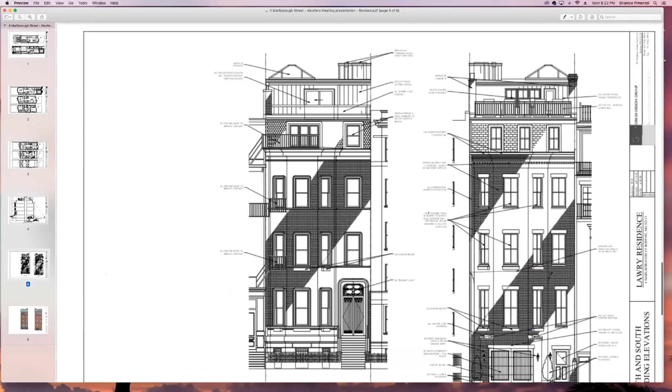Guy, if Shanice could just go to the top of the building view, I guess maybe slide 5. Sorry, Guy, I want to make sure - slide 5, what slide you would see it on, drawing A3. A3, do you know what number slide it is for the deck?

It should be the 3rd drawing. If you look at the 5th floor plan, the middle floor that says 5th floor, you'll see some details there.

On the right-hand side you'll see a deck, a roof deck, which is an existing deck up there. There's a dotted line that bisects that deck, which is the current location of the front wall of the penthouse. So we're pushing back the front wall by removing a section of the penthouse.

Towards the rear of the penthouse, you'll see another dashed line running through what looks to be a wet bar or kitchen area. There's about a 4-foot extension, maybe 3.5 feet, proposed to the rear part of the penthouse. So we're essentially shifting the penthouse towards the rear and reducing it in size. It's no higher than what's up there.

We are proposing an elevator shaft to extend above the roof. That's excluded from the building height by the zoning code, so it's not shown there, but there is a projection on the roof that doesn't require zoning relief. Obviously all of this, if approved at the ZBA, will still need to go through the rigorous Back Bay Architectural Commission application, discussions, presentations, and approvals. So this is just for the zoning violations.

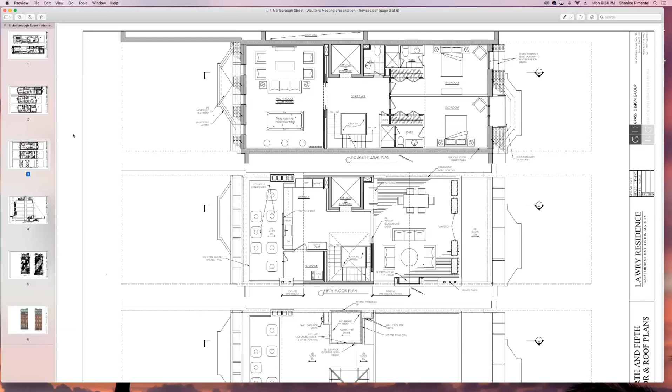The other issue is the rear yard setback. Did you want to show the elevation on the next slide? Yeah, sure, Shanice, if you can do that. There's a colored version of it—I don't know if you were able to get that in the presentation. Is it this one? Yeah, although the other one might give us a little more detail.

That is a prettier version for sure, but the other one might give us more detail with a guide dash line in there—you may want to describe that. Are we talking about the building section, drawing A4?

That's right, that's a good drawing to segue into the next part. It shows the location of the penthouse and the dashed lines of where the penthouse was and will be, and its visibility, which is an important consideration. But again, that's more of an architectural commission issue.

The other aspect is we'd like to square off the rear bay at the ground floor so we can introduce the garage door. And again, as Mike said, we're not extending the building closer to the rear property line except underground, and that underground portion is not subject to the rear yard setback—it's actually an exception, so you can build an underground encroachment into the rear yard up to about 5 feet above grade.

We're not going all the way to the rear property line, and we're not going above grade, so it won't be visible from the outside, but we are proposing to build underground towards the alley line.

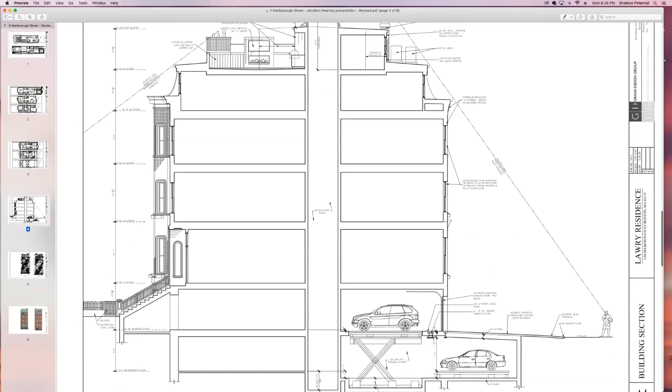But again, that's not subject to the zoning variance. The two parts at the rear are squaring off the angled bay, and we're also proposing to add two stories, extending that rear bay up two levels. Currently it ends at the 2nd floor, and we're proposing to extend it up to the 4th floor. Both squaring off the bay and adding the two levels are technical violations of the rear yard setback because about 1.5 feet of it is actually within the rear yard setback.

So the bay that's out there from the ground up to the 2nd floor is currently in violation of the rear yard setback. The building adjacent to us to the west goes all the way out to the alley line, so it's not uncommon to see an existing building in violation, but the addition of any space does need to conform to the zoning code.

So those are the two major violations. The third item was the GCOD. This is unusual because I haven't worked on one of these yet where someone had already gone through the GCOD process and obtained it. I don't know if you're all familiar with that process, but basically the city requires now—I forget what it's called, Mike—a special permit. Not a letter, it's the conditional use permit, so it's not a variance.

Article 32, GCOD. Right, so what the city did was add this section to the zoning code that requires an applicant doing any extensive renovation exceeding 50% of the building's value, or excavation below elevation 7—essentially into the groundwater—to obtain a conditional use permit from the ZBA.

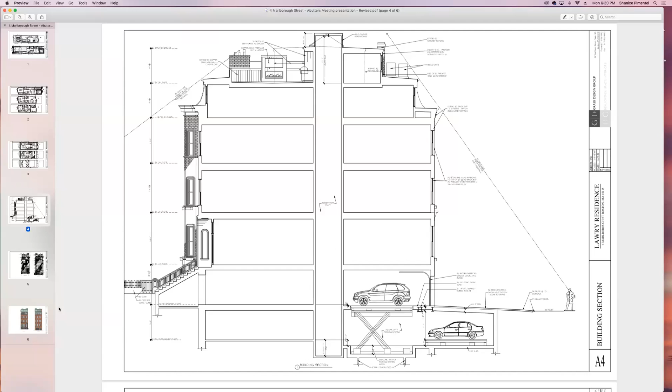Replacement of some certain parts and pieces. We're proposing a fence in the front yard.

One substantial improvement to the building that doesn't require zoning approval, but the Lawrys would like to do, is to remove the side entrance, a basement-level entrance alongside the stoop. We've looked at historic photos and discovered that side basement entrance was never there originally, it was added at some point. When you look closely, you can see it wasn't original stonework, and although it was decently done, it wasn't an original feature. So our proposal is to reconstruct what was there historically.

Interestingly, there was a door installed in the center window of the bay at the basement level. We have an old photo of that, which is kind of interesting, and again, that was not original either. It's been repaired at some point, not sure when.

All of these other features, the fence around the front yard, the landscaping, all that stuff will be subject to the Architectural Commission hearing, so it's probably not worth going through all that here.

Just to round out what you had to say, Guy, the elevation page we're on right now: if people look at the right-hand side of the building, the rear of the building, you'll see how that bay Guy was talking about is extended by an additional story, or 2 additional stories?

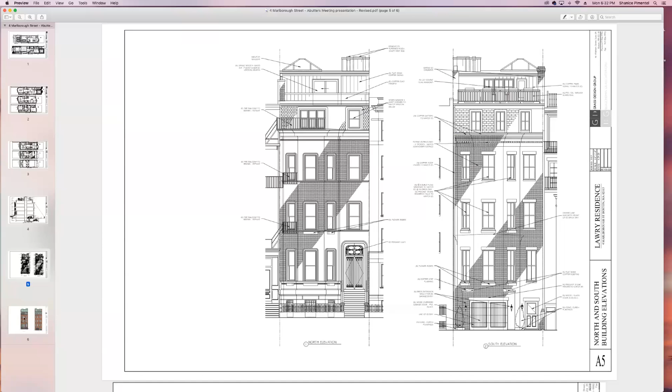Just to round out this presentation, if you want to go to page 4, it's a better detail to show this. So this is the basement. The sub-basement is the lower level, and at the bottom of this drawing is the basement. If you look in front of where the car is and where the lift is, you'll see the squared-off section that's a little bit darker, where the entrance of the garage is itself.

That little bit there is the addition to allow the car to go into that garage. I'd say it's about 2 feet on each side. That was added to allow for squaring off the rear of the building to let the car enter. I hope everyone can see that too.

I think maybe that's a good place to stop and answer any questions. Cool, let me just check what's going on.